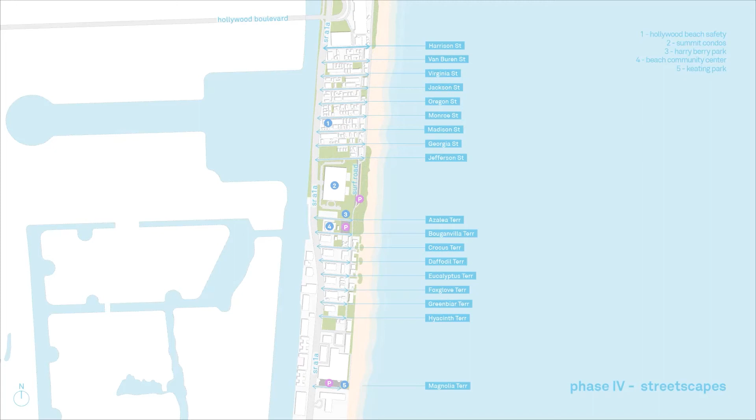Hello and welcome to the Harrison Street Undergrounding of Overhead Utilities and Streetscape Beautification Conceptual Design. In this video, we will be highlighting the upcoming changes occurring on this street during the Phase 4 Undergrounding of Overhead Utilities and Streetscape Beautification project.

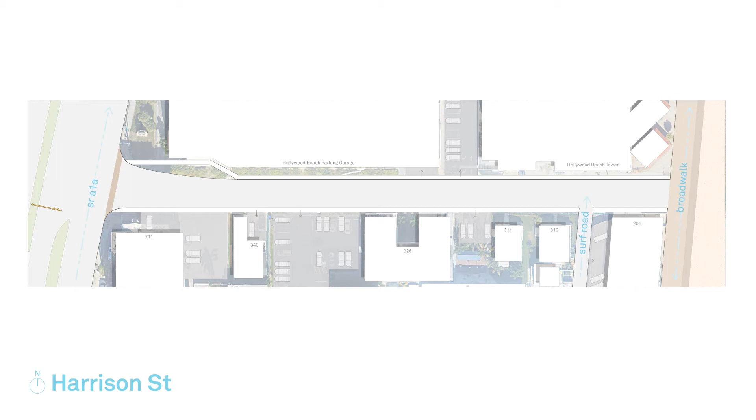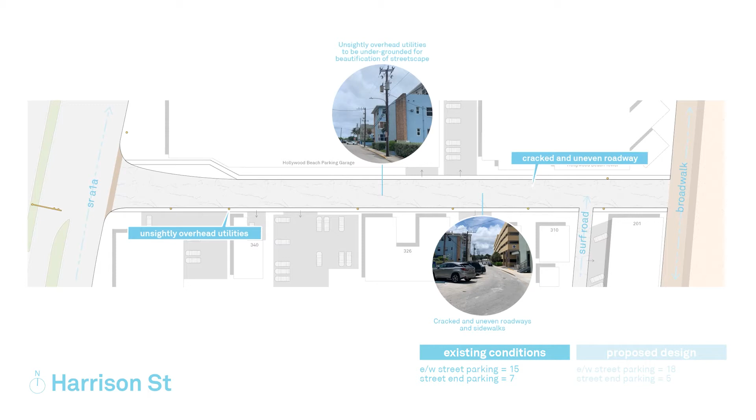These images illustrate the existing conditions both at the street and the street end. The information provided is based on conceptual designs and is subject to minor revisions during the engineering, regulatory, and construction design phase. Currently on the street, there are unsightly overhead utilities along with damaged patches of asphalt on the roadways and sidewalks. The existing streets are two-way traffic with parking at both ends of the street.

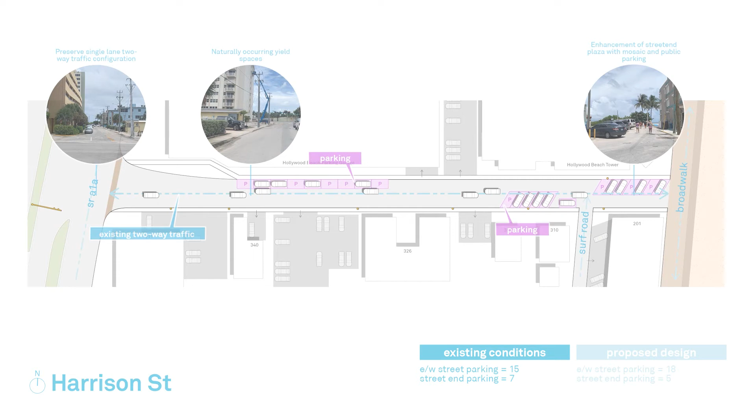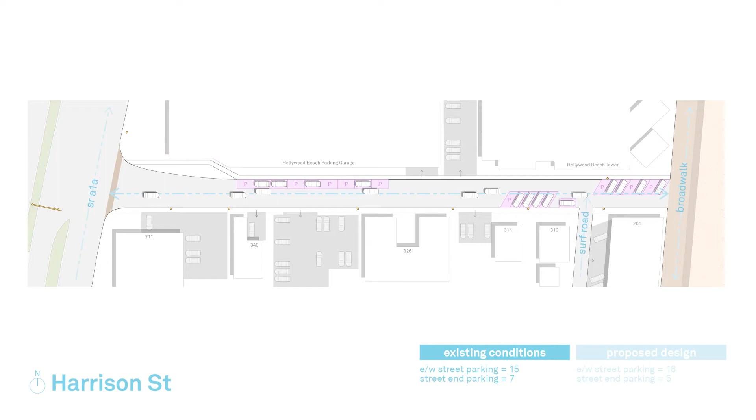Due to the nature of implementing the undergrounding of overhead utilities and streetscape beautification, the parking spaces, regulatory agency oversight, public lighting, and landscape improvements will be markedly different than the current conditions as seen today. Each street is a custom design based on existing conditions. The proposed design will incorporate newly constructed sidewalks and roadways with brand new paving that will extend onto the street end.

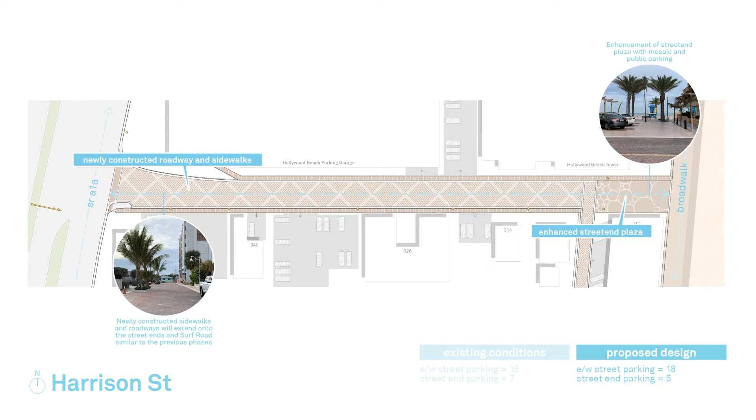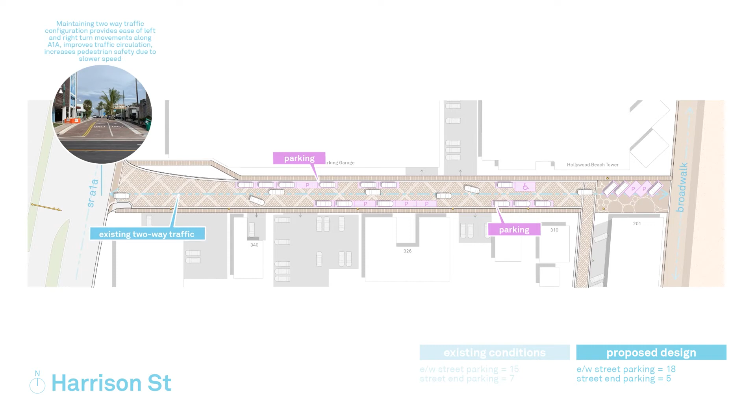The photos shown depict images of the completed streetscape from previous phases 1 through 3 and are an example of the same types of lighting, hardscape, landscape, and streetscape improvements that will be implemented on this street and the entire phase 4. As requested by the community, the current traffic pattern is being maintained, i.e., two-way traffic with a single lane in each direction and parking on both sides of the street. Existing driveways will act as natural yield spaces, an area where a car can pull into to allow another vehicle to pass by.

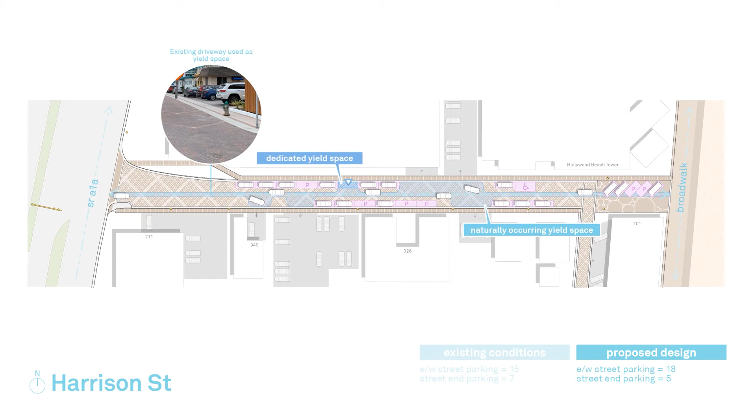Encroachments into the right-of-way have been addressed by the city passing an ordinance reducing the amount of space required on private property for parking, i.e., if there is 16 feet 0 inches in a perpendicular configuration and/or 8 feet 6 inches for a parallel parking space, then these spaces will continue to function as parking on private property. In addition, if private property owners have wheel stops or small garden walls which can be reconfigured to allow for additional private parking, CRA staff will meet with those private property owners.

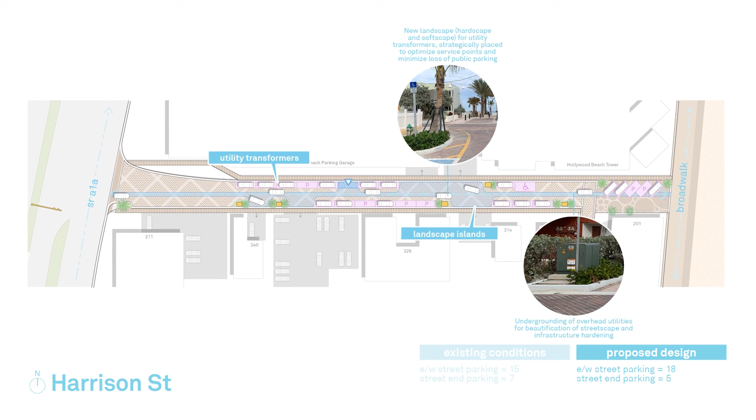The undergrounding of overhead utilities will result in utility transformers that will be placed in strategically located landscape islands to optimize service points to adjacent properties and minimize the loss of public parking spaces. Street lighting will also be upgraded to LED marine turtle-friendly lights as seen in the previously completed streetscape projects from Tyler Street to Thomas Street and Iris and Jasmine Terraces.

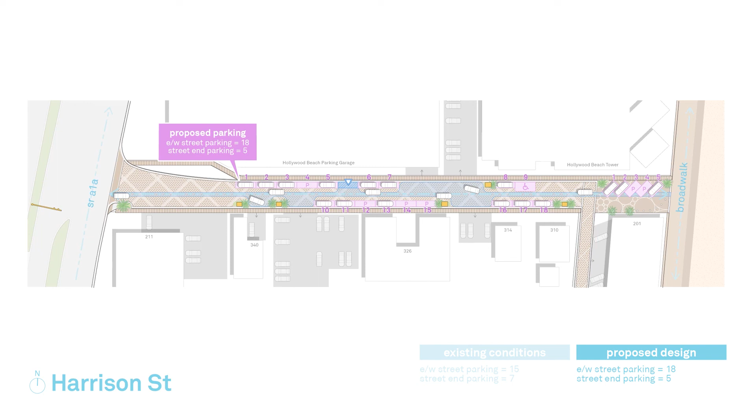The design of each street maximizes retaining as many public parking spaces as possible, while dedicating the areas needed for transformers as part of the undergrounding of overhead utilities. For Harrison Street specifically, Broward County regulations and FPL equipment needs result in a net gain of 1 space, i.e., 3 public parking spaces added on the east-west street and 2 parking spaces lost on the street end.